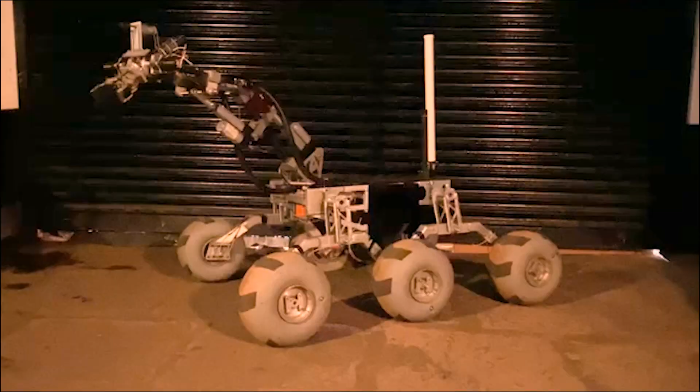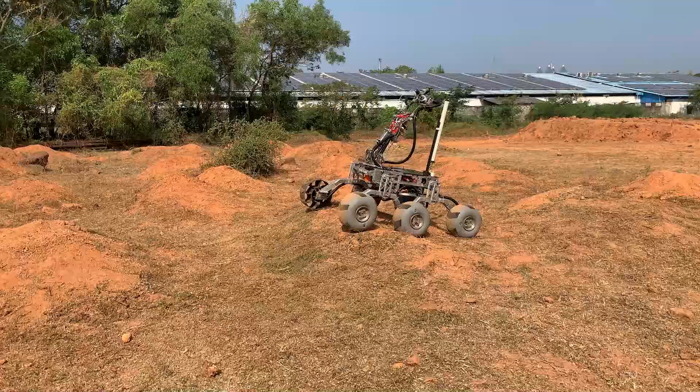Mars Manipal is proud to present its rover for University Rover Challenge 2022. This year, the mechanical subsystem aimed to reinforce the robotic manipulator and make further improvements to our drive system. Our custom 6-wheel independent suspension based on a 5-bar mechanism allows the rover to climb obstacles up to 0.6 meters and descend a vertical drop of 1 meter.

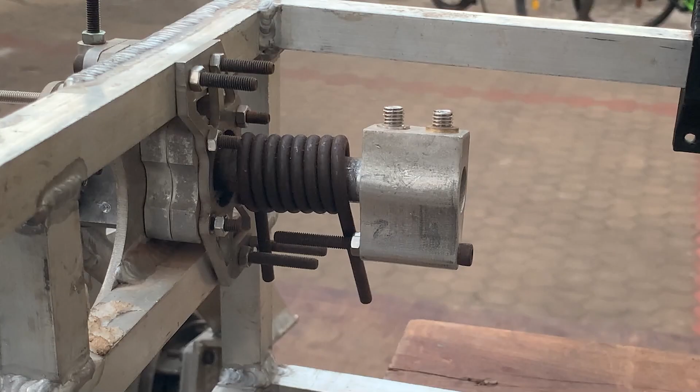The 5-bar mechanism is constrained by preloaded torsion springs, allowing optimal ground conformability. The suspension and antenna articulation enable the rover to fit the required 1.2 meter cube. The chassis comprises a compact tubular space frame structure serving as a mount for auxiliary rover modules.

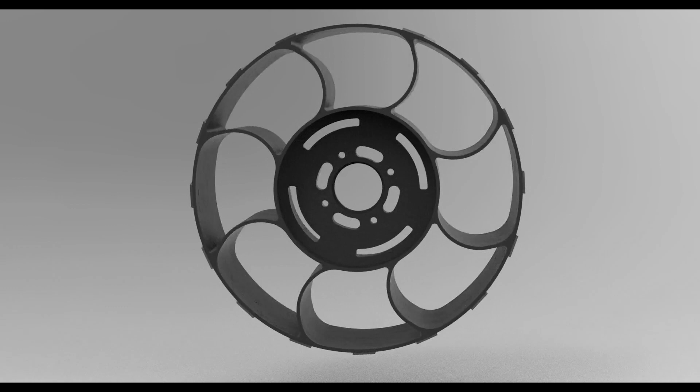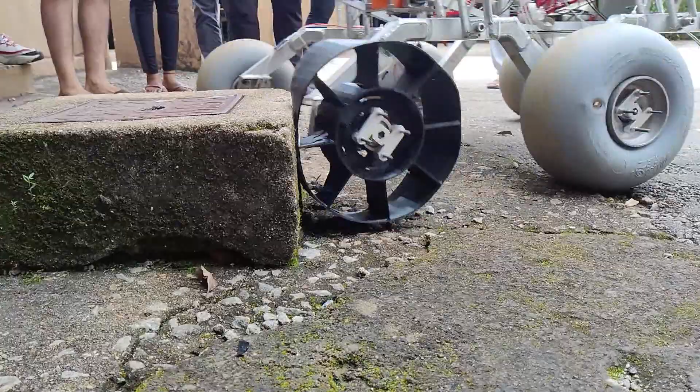Our modular lightweight 3D printed wheels improve ease of assembly and are interchangeable with low pressure polyurethane balloon tires. The wheel assembly features a fully floating axle powered by multi-stage planetary gearboxes. Each prototype has been extensively tested based on strength and compliance.

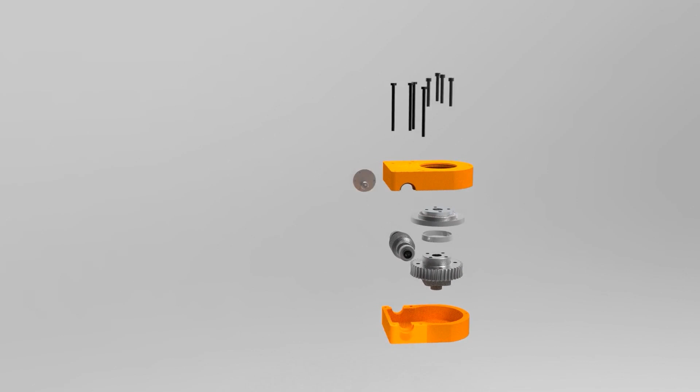The 6DOF articulated robotic manipulator, fabricated using carbon fiber tubes, features two high-power encoded linear actuators. Backdrive is effectively prevented by a zero backlash 1:40 reduction worm drive in the swivel base, while shaft eccentricity is compensated for by an Oldham coupling, ensuring smooth power transmission.

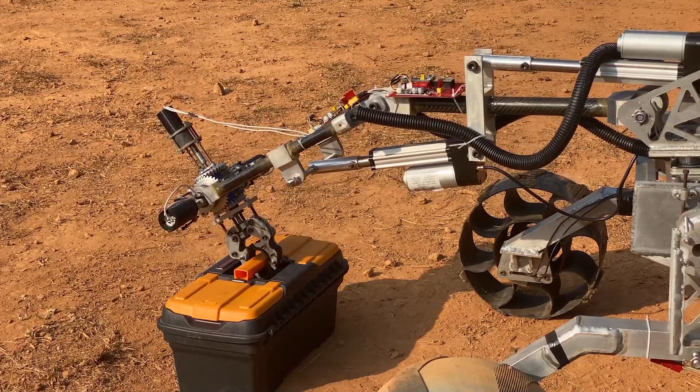The end effector comprises a bevel gear differential and a lead screw based gripper that allows for precise interaction with the environment. For extreme retrieval and delivery task preparation, rover traversal has been tested at a dedicated site consisting of steep slopes, vertical drops and rocky fields.

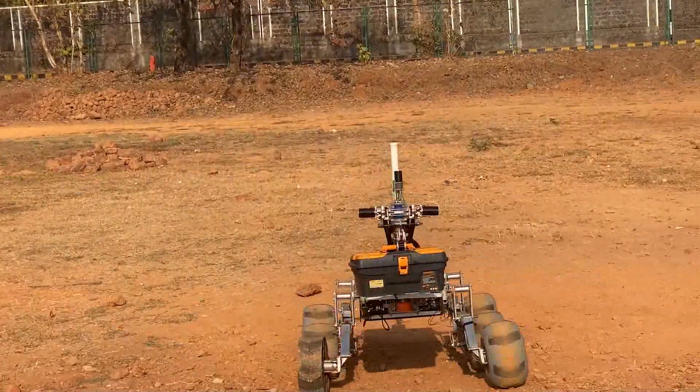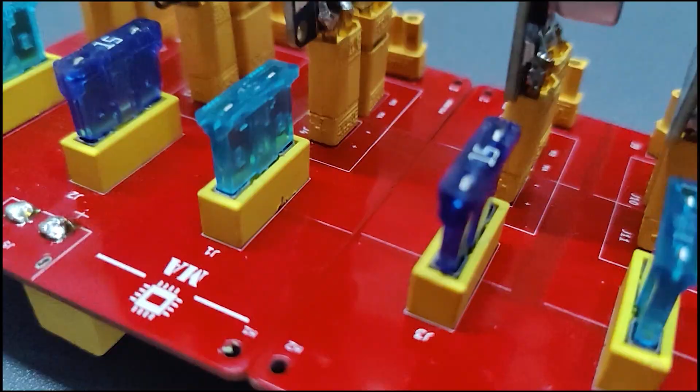We have practiced carrying various payloads to specified locations and pulling objects attached to ropes, thereby testing the mission readiness of our rover. The electronics and control subsystem focuses on operating the rover, integrating core electronics and embedded systems. Custom PCBs have been designed to optimally utilize the limited space available inside the chassis, thus reducing wiring and making rover maintenance easier. SolidWorks Electrical 3D has been used to simulate all real-time electrical wiring of the rover.

ARM Cortex-based STM32 microcontrollers, acting as CAN nodes, are responsible for precise rover control. Each link of the robotic manipulator is attached with a PCB, which houses an IMU and the STM32, which connects the entire manipulator on a single CAN bus.

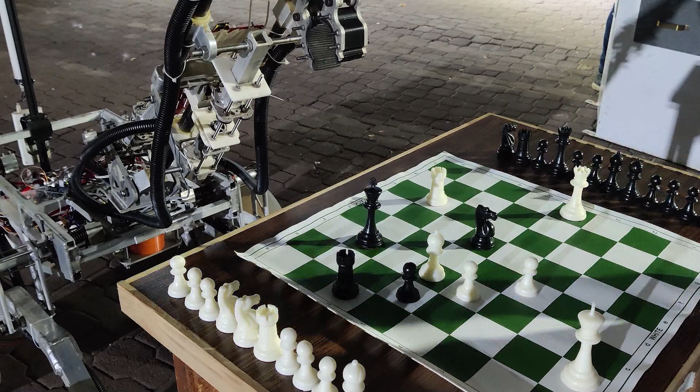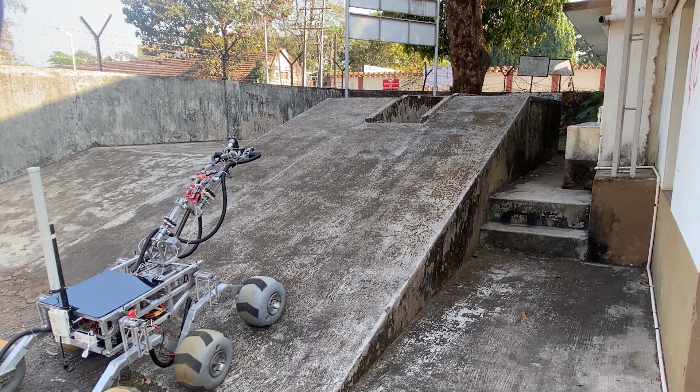Velocity kinematics integrated with our path planning algorithm has been utilized for end effector position control. Orientation values obtained from the IMUs are used as feedback in our PID algorithm to control the angular velocity of each joint. The 6-wheel skid steer is equipped with hill assist for maintaining the rover's position on uneven slopes. As an added measure of safety, a kill switch has been added for emergency stop of the rover.

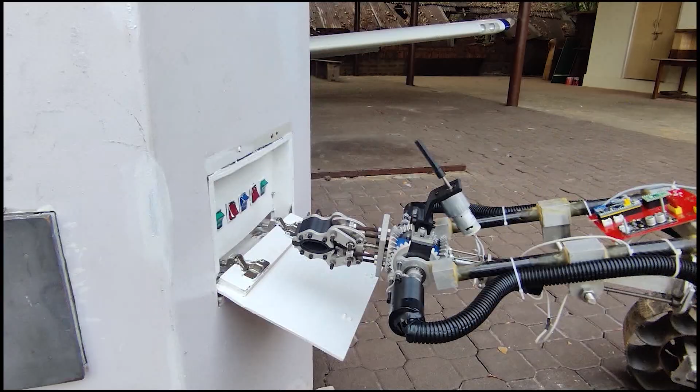For the equipment servicing mission, a custom graphical user interface and an equipment servicing panel have helped us to practice opening and closing of latches and drawers, toggling of switches, operation of a joystick, inserting a rugged memory stick into a USB slot, and tightening Allen head fasteners. Our robotic arm is also capable of typing commands on a keyboard and inserting a cache container into a close-fitting drawer.

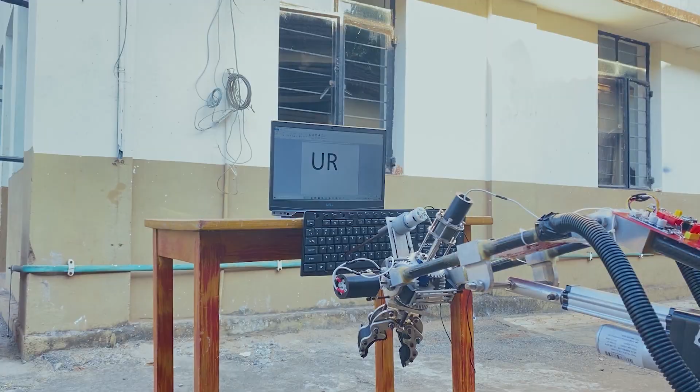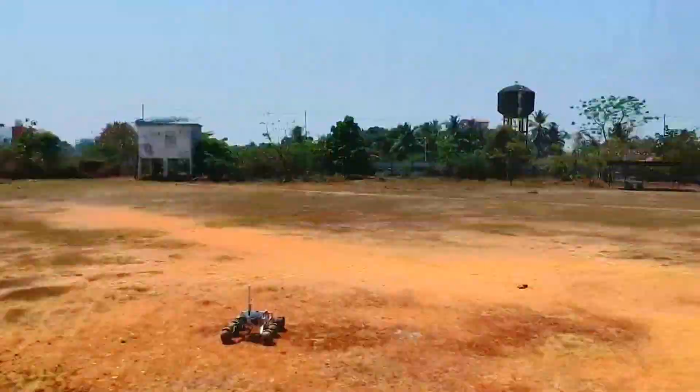To communicate between the rover and the base station, 5.1 GHz frequency bands are used. A combination of omnidirectional and directional antennas ensures a continuous communication link with the rover. The rover is capable of a non-line of sight communication link up to a distance of 1 km.

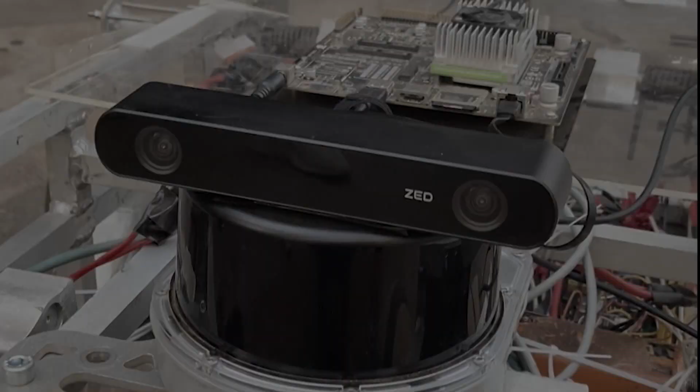The autonomous subsystem is responsible for designing the navigation stack for the autonomous mission. The computation is handled by NVIDIA Jetson TX2 and Jetson Nano. The control structure uses skid steer kinematics to compute PWM for the motors on an ESP32. The LiDAR and ZED 2 stereo camera generate point clouds. The visual odometry is fused with other sensor data using an extended Kalman filter.

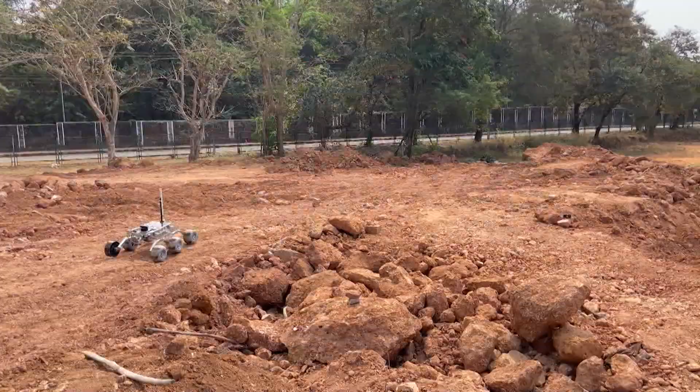Our path planning algorithm is inspired by vector field histogram to avoid obstacles using point cloud data. RTCM data from DGPS and IMU is used to traverse from one GPS coordinate to another. A custom search pattern algorithm has been developed to traverse the terrain along a geometric pattern to find ArUco markers and accurately estimate the position.

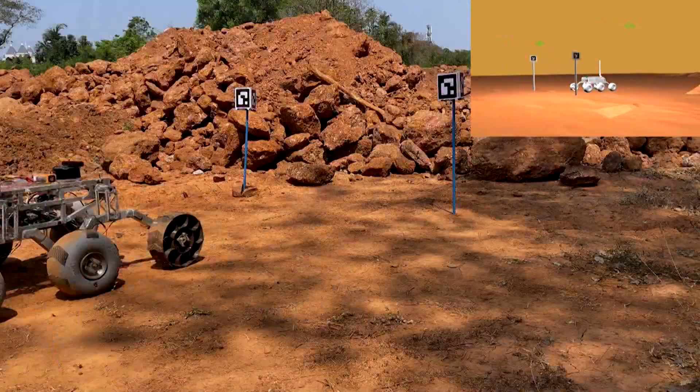The gate traversal algorithm uses the marker's pose to plan a triangular path parallel to the marker plane, avoiding the small space issue and traversing through the gate. Flashing green LEDs indicate the completion of the leg.

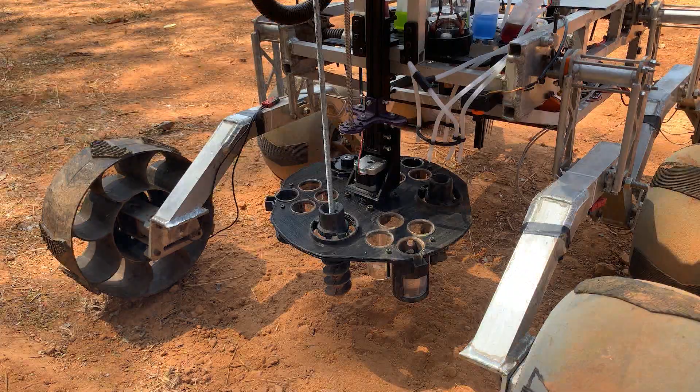The life science subsystem has incorporated distinctive chemical assays to detect the presence of active biomarkers of extinct and extant life. Lead screw-based linear actuation assemblies are used for soil collection. 3 separate augers have been implemented to prevent cross-contamination between samples. Peristaltic pumps are utilized for delivering chemicals through the analysis compartment.

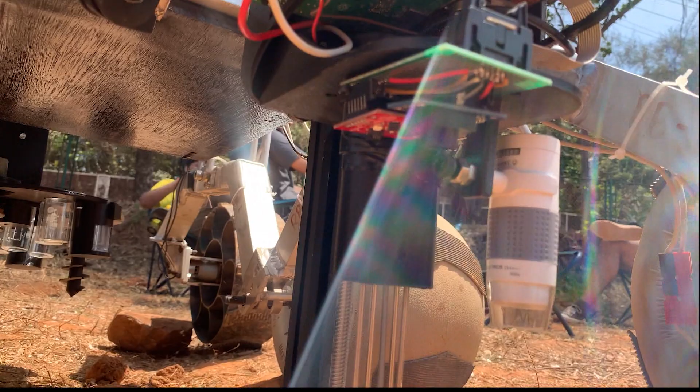This year, we have implemented a water bath powered by a magnetic induction heater to perform the DNS assay for carbohydrate detection. We have tests for detecting the enzymatic activity of soil, Bradford test for proteins, and HCl test for carbonates. Our sensor suite houses an optical microscope for comprehensive soil and rock analysis by studying the microscopic textures, patterns, and crystal structures.

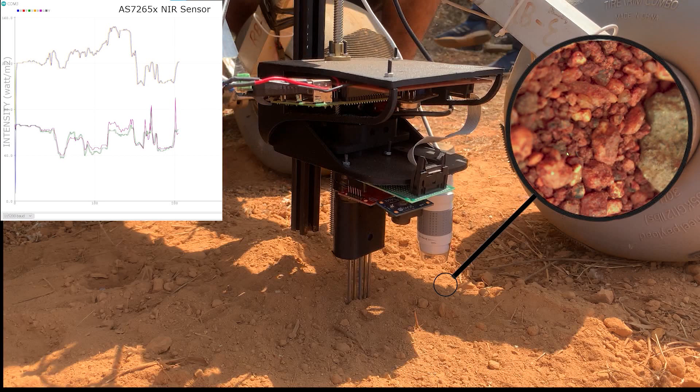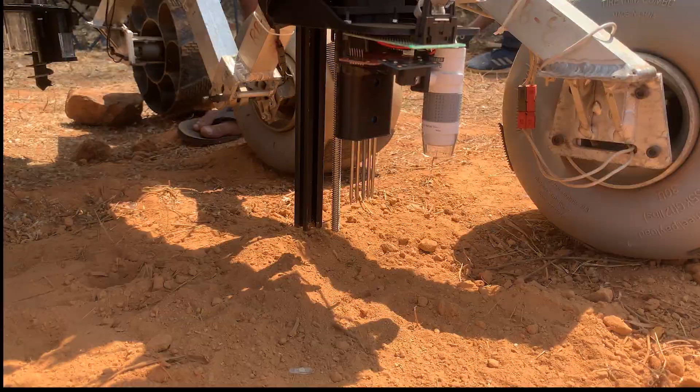A total of 8 sensors have been implemented to detect volatile organic compounds, ozone, CO2, humidity, soil moisture content, electrical conductivity, and temperature. The spectral sensor-generated peaks are analyzed to determine the soil's chemical composition. A custom rock database has been formulated to efficiently identify and classify rocks present at the testing sites.